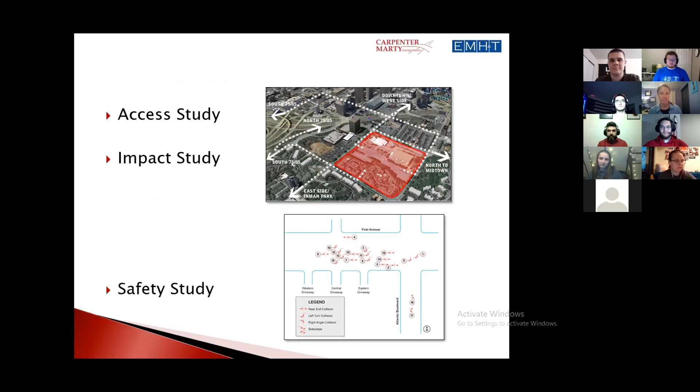So first of all, traffic studies. We're going to be talking about access and impact studies, and then safety studies after that. So for access studies, they're generally the smaller type of impact studies.

So you have a development, and let's say it's a Kroger. You need to do a study to tell the developer what they need to pay for. Do they need a traffic signal? Do they need to add turn lanes? Things like that. So an access study is generally just looking at those specific access points, turn lane warrants, sight distance analysis, just smaller things like that.

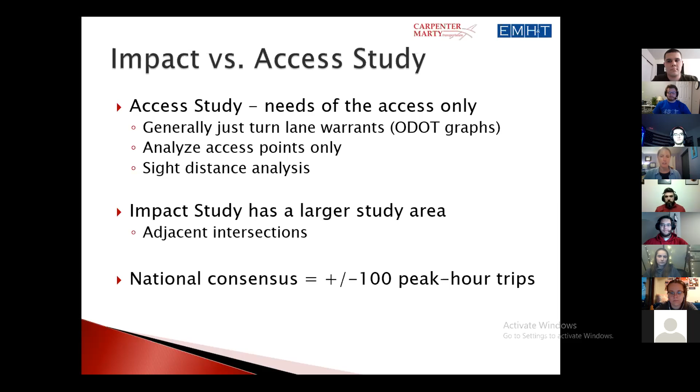Whereas an impact study is a lot larger of an area. You're going to be looking at the adjacent intersections in addition to just those access points. And the national consensus is that if your development has over 100 peak hour trips, then you're going to trigger the need for an impact study.

Okay, and then here's kind of an idea of how those peak hour trips get larger, and then how that triggers a larger study as well. So 0 to 100 peak hour trips are just site drives, whereas 100 to 200, you start getting into intersections, and so on. It starts getting into a larger and larger study based on the size of the development.

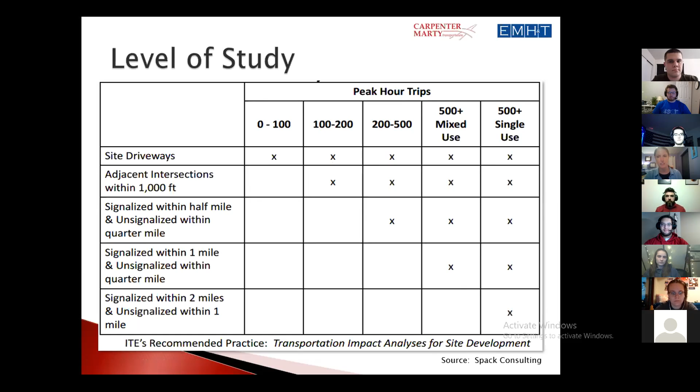Okay, and then some of the other basics. Once you get a developer, they generally have no idea what a traffic study is. They don't know anything about it. So you're there to tell them what they need, what you have to do. So you kind of decide based on the size, is it going to be an impact study or an access study? And then you look at the surrounding area too, like are there other developments happening nearby that we need to consider as well?

You decide on your opening year and your design year. So you don't want to just design your turn lanes for what's going to be there right now. You want to look with growth rates surrounding the area. You might need more turn lanes later, whereas opposed to now, you may not need them.

You also have to do data collection, so turning movement counts, things like that. And usually we just do the AM and PM peak hours, but sometimes you might need a lunch hour, or you might also need to do the school afternoon peak hour. Something like that could get added in just based on the site needs and what's in the surrounding area.

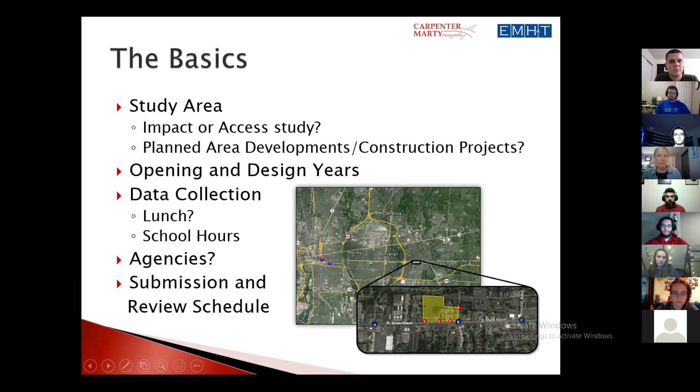You also have to look into the agencies involved. So if your development is in one city, then obviously that city is going to be a reviewer. But sometimes the site is one city, but then the nearby intersections are the county or another city. So sometimes you can get multiple agencies involved. And then after that, you submit the study, they review it, give you comments, and then you revise and go back again.

So then you also do some trip generation and figure out how to distribute that traffic. Let's use the example of the Kroger. You determine how many trips that Kroger needs, and that's based on the land use. You have your grocery store, you have a bank or something like that involved. Let's say you have a Kroger next to a bank.

You may be able to have some internal capture reductions because you might have somebody who's going to pick up their groceries and go to the bank in the same exact trip. So you won't need to double those trips. You can have some reduction based on that. Or if there's transit around, there could be reductions based on that.

There's also different types of trips. You could have trips that are people just going to the grocery store and back home. But then you could have somebody who's driving to stop at the grocery store on their way home from work and then continuing on the same path. So you have different types of trips you have to look at.

And then, like I said before, you're looking at not just your development but also developments in the area and how that impacts the improvements you may need. You look at the distribution of those trips. So it's not just 100 trips going in and out of the Kroger. You have to figure out where those trips are going from each site drive. Are they going to the north or the south? Where do you think those trips are going to and coming from?

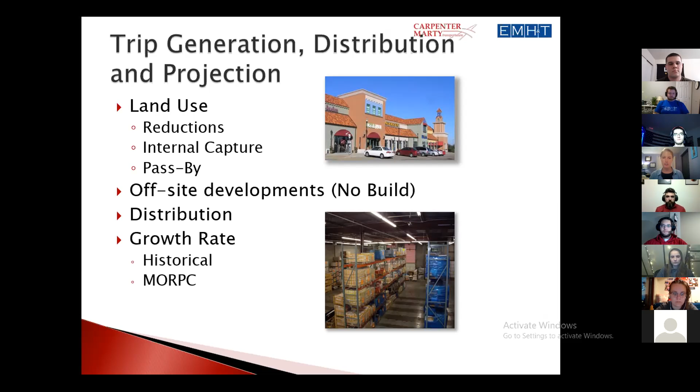And then the background growth rate, because you have your development and other known developments, but there's a lot of growth going on outside of that. So typically we look at historical count data, see how the counts have grown over the years. We also contact MORPC, the local MPO, and they'll give you a general growth rate as well, although they'll take weeks to give it to you. So sometimes it's easier to do that on your own.

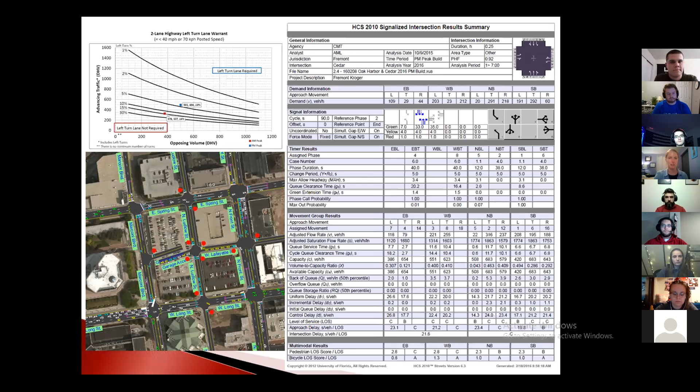Then you take that information and do capacity analysis here on the right. It shows you the control delay, the level of service, things like that. The city will tell you they don't want to exceed a level of service D, so you need to recommend improvements that bring the level of service back to what they consider acceptable. Then you have turn lane warrants over here - there's a certain number of turning movement volume that will trigger the need for a turn lane, so there are graphs you use to tell if you trigger that or not.

Basically with an impact study and access study, they're both just telling you what things are like now, what they're going to be like in the future, and then what they're going to be like after the development is over. So they can pin those improvements on the developer and the city doesn't have to pay for all of that.

After we do the analysis, you look at it stage by stage in your existing, no-build, and build conditions, and see what improvements are needed for each scenario. Then recommend solutions after that, bundle it all up in a report and go from there.

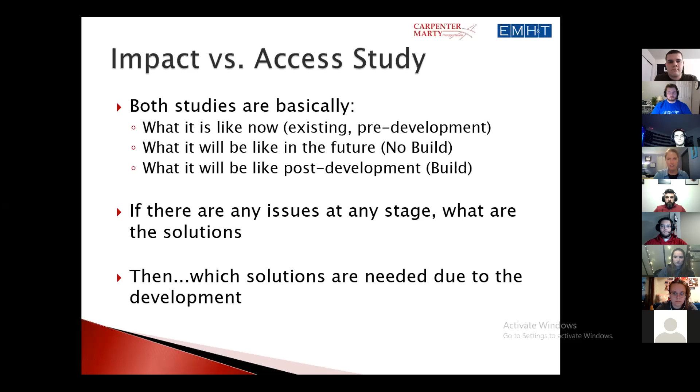Okay, then next I'm talking about safety studies, which is my personal favorite topic. So each year ODOT prioritizes their roadway segments and intersections throughout the whole state, and they basically choose which intersections they want to study.

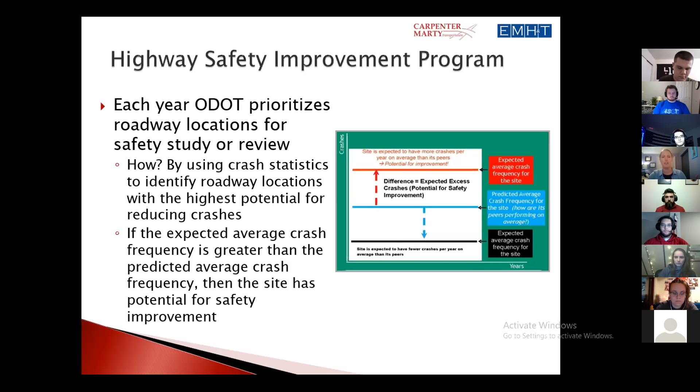They do that by looking at crash statistics and identifying those locations with the highest potential for reducing crashes. So they look at the expected average crash frequency and compare that to the predicted average crash frequency, which is based on the type of site and how it compares to its peers, and that determines if that site has a potential for safety improvement - whether it's worth making those improvements.

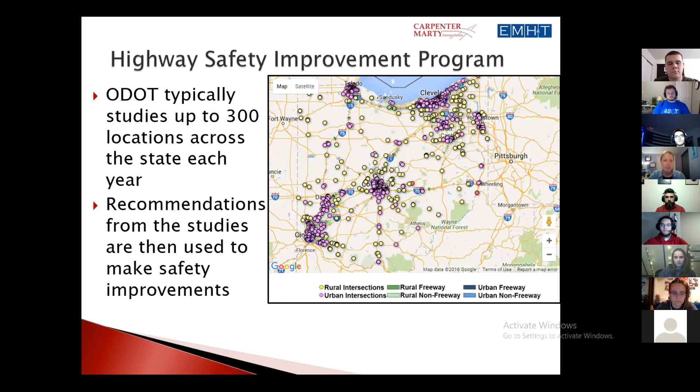Here's a map of those locations, and this is kind of old too, but you can see generally there are big groupings of these intersections and segments where the big cities are - so Cincinnati, Columbus, Cleveland, Toledo. That's where all our high crash intersections are, with some sprinkled throughout as well. Then we study those sites and tell them if they need to make safety improvements and what those improvements would be.

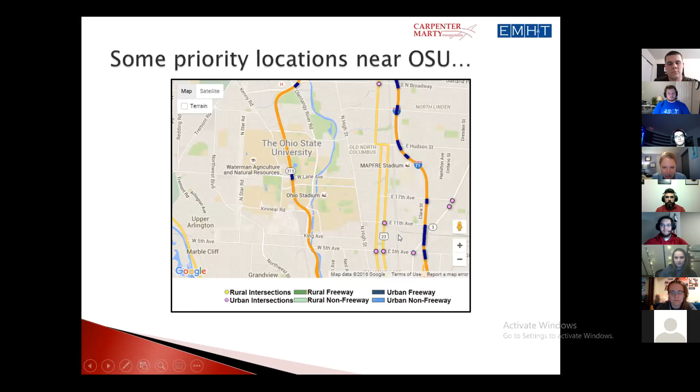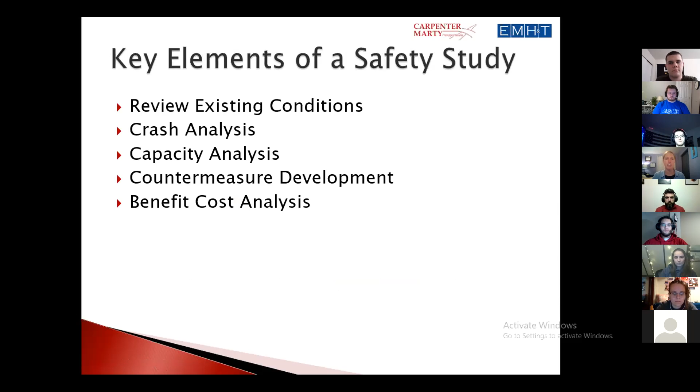Okay, so some key elements of a safety study: first we just look at the existing conditions. Sometimes just by doing a site visit, you can immediately tell what the issues are. Then we look at the crash analysis, the capacity analysis, and start developing countermeasures, and then we do a benefit cost analysis, which I'll go through.

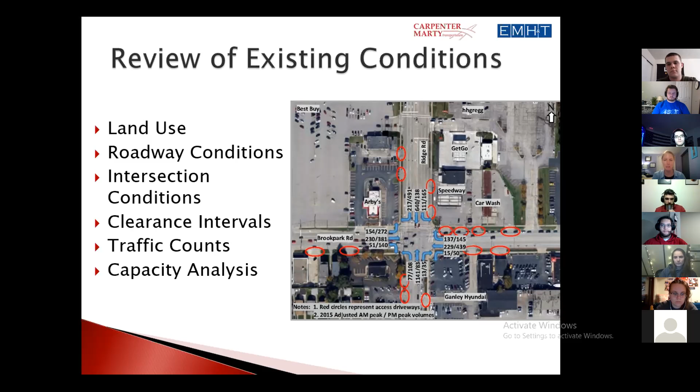You look at the roadway conditions. Is there a lot of pavement rutting? Things like that. Intersection conditions. How does the signal operate? Is it stop controlled? You look at the clearance intervals, the traffic counts, and then you do capacity analysis, because sometimes you'll find out that there are crashes just because drivers are frustrated and they can't get through the intersection. So they're trying to push that yellow, which can cause crashes.

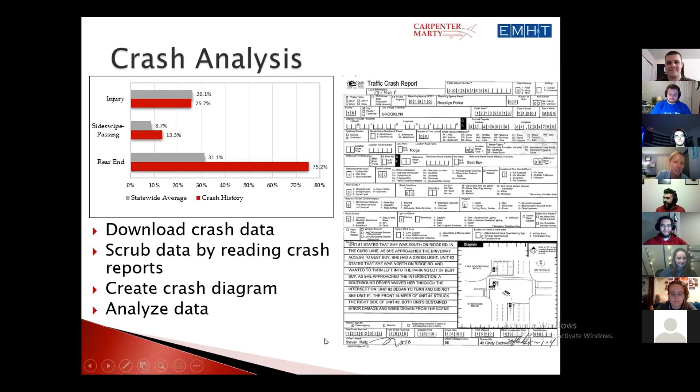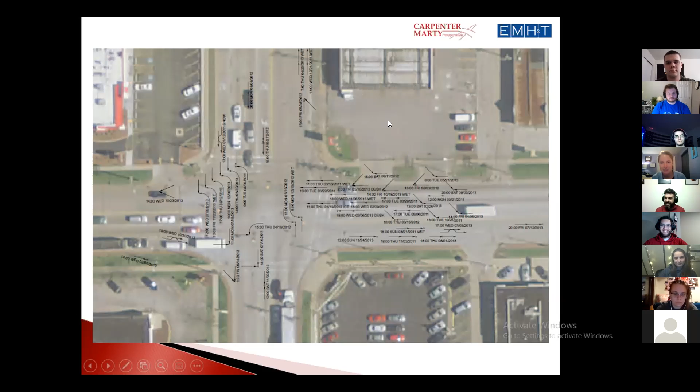But so basically you review all that data, you analyze it, and then you come up with this crash diagram, which helps to show trends in the crashes. So you can see, like over here, there's a lot of left turn crashes. Over here, there's a lot of rear end crashes on this approach, and a lot of angle crashes here at these site drives, because I don't know why this gas station decided they needed 4 different access points. It's a little redundant, just adds more conflict points.

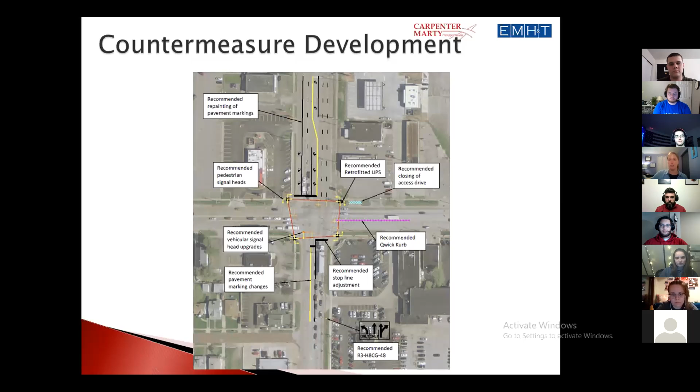And then we may make some little recommendations like signage, or adding some signal upgrades, pavement marking upgrades. The changes could be smaller or larger, and usually we do make those low cost, quick fix recommendations. So that way, if they want to do something really quick, they can, while they're waiting for their roundabout to be designed, 3 years down the road.

Okay, and then after you decide what you want to do, you make a cost estimate for that. So like, what's it going to cost ODOT to implement a roundabout at this intersection? And then they have this database that basically tells you how many crashes they expect that to mitigate. And it's sad, but they put a number, like a price, on those crashes. So injuries, fatalities, just minor fender benders, everything. They have a crash cost associated with that.

So then you're comparing the cost of that roundabout improvement to the benefit of reducing those crashes, and then you come up with this benefit cost ratio. And so that tells you, is your project that you're proposing worth the investment? And I will say, it's not always straightforward. There are so many times where there's projects where we have a benefit cost ratio that's less than 1, but just using engineering judgment, that it's a good recommendation and that it's going to mitigate crashes. So it's not the end all be all.

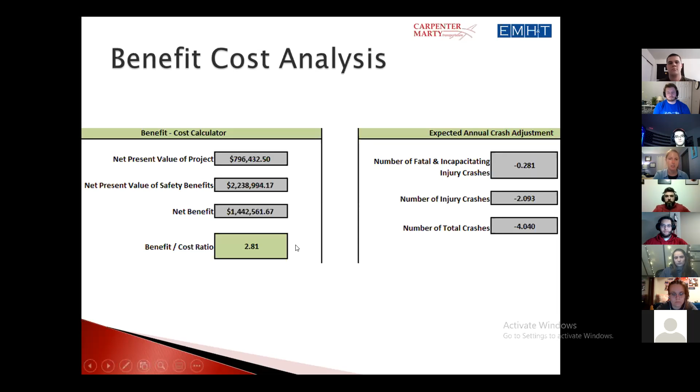Okay, so I have this, but I don't know if you want to take questions now or kick it to Nick and take questions at the end. We can do both, unless anybody has a burning question they want to ask just right now. Cool, then we'll kick it to Nick. All right, we'll keep going.

All right, can you see the screen? Yeah, that looks great. Perfect.

So Gina covered the traffic planning side of what we typically encounter on a regular basis. I'm going to go through the different traffic engineering design components that traffic engineers with our companies would handle. So at both Carpenter Marty and EMH&T, we'll cover both sides of traffic engineering, the planning as well as the design work for various projects. So I'll go through what we typically encounter in the design as traffic engineers.

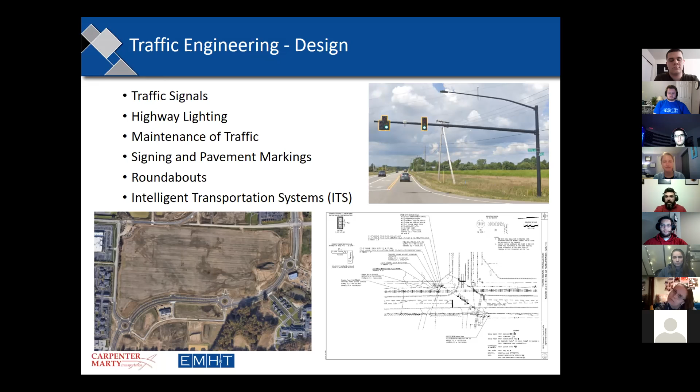These are the steps that come after the planning portion is completed. Then we'll go through this process to actually turn the planning into a project. So the first item I wanted to touch on was traffic signal design.

Span wire signals generally save a little bit of cost, and one advantage is you can span a lot larger roadways. If you've driven in the Polaris area or anywhere with a really large multi-lane roadway, sometimes you'll see these because the mast arm is limited. You can't have a 100-foot or 150-foot arm, it starts to get a little impractical, so sometimes span wire is preferred in those cases.

With the mast arms, they cost a little bit to quite a bit more, but a lot of times we'll work with agencies and they'll prefer these over the span wire just to fit their streetscape, making sure they have a coordinated color scheme and decorative poles that match their light poles. So the mast arms can provide a little bit better looking traffic signal, and agencies, especially cities, like that a little bit more.

Additionally, mast arms provide a little bit better visibility. As a driver, when you approach a mast arm, it tends to stand out a little bit better as you approach an intersection, so from a safety aspect that can help over a span wire. Drivers are more likely to notice an object, especially if they haven't driven through a signal or it's been a long stretch, so it can make the visibility a little bit better.

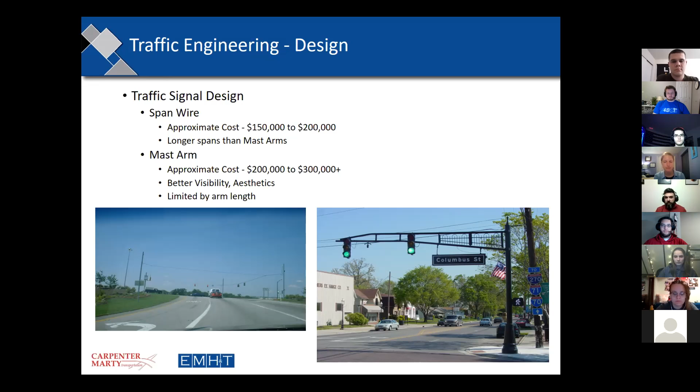So there's definitely pros and cons to both. As traffic engineers, depending on the agency preference and what the project calls for, we'll design one or the other. We encounter both of these on a pretty regular basis.

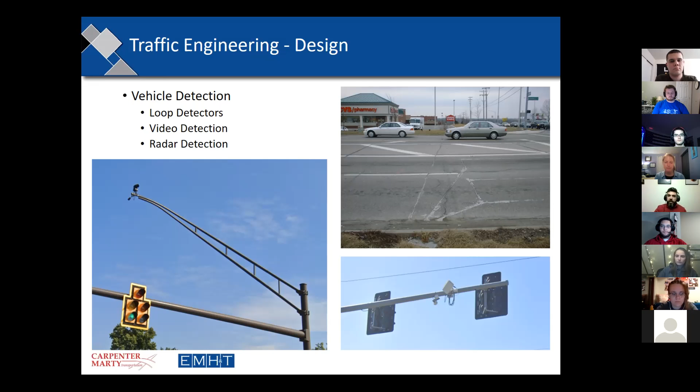In addition to the traffic signals for vehicles, we'll also design pedestrian traffic signals. These are for roadways that don't necessarily need a traffic signal, or for crosswalks like mid-block crossings, not necessarily at a major intersection.

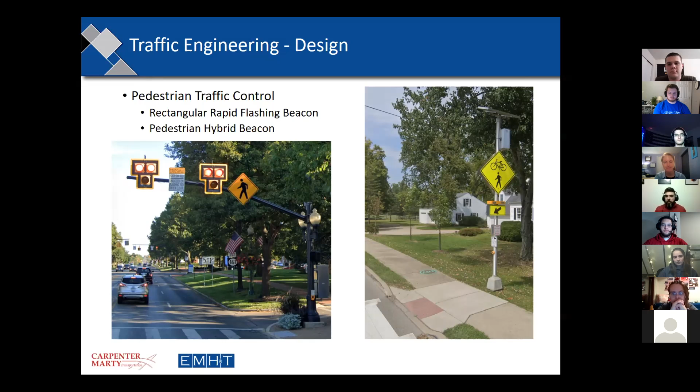Essentially these function slightly less involved than a full traffic signal, and they're more appropriate for pedestrian crossings. So when you have a crosswalk and maybe you're getting poor compliance for vehicles stopping for pedestrians, or you just have a lot of pedestrian traffic, these can be used to help facilitate that crossing and make drivers aware that this is where the pedestrian crossing is.

I focus predominantly on traffic signal design, so I'm going to touch on some other aspects of design that I have a little less experience in, just to give you a background and show the broad range of what we cover. Highway lighting is something I didn't even know, graduating college, that a traffic engineer handled, but it kind of goes hand in hand with the signals and the wiring that we do for those.

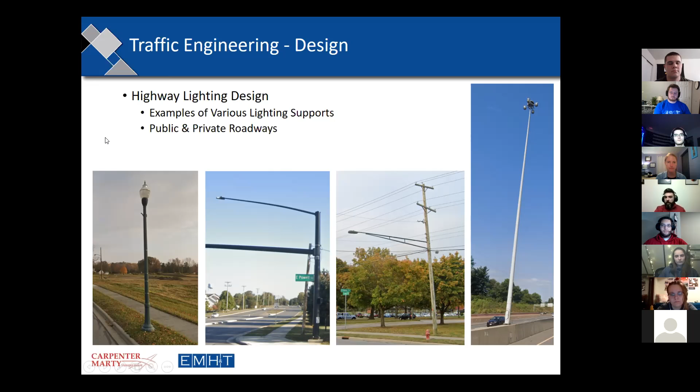We'll actually design and place street lighting for various facilities, and it can range anything - on the left we have just a decorative pole for a low volume, low speed roadway like a residential street, and all the way on the right is a sample of what you've probably seen everywhere, freeway lighting with high mast supports, and pretty much anything in between. So highway lighting is something the traffic engineering design department handles as part of the roadway design process and putting together the plans.

In addition to deciding what type of poles we'll place, we'll also physically locate the poles. We'll do analyses called photometric analysis - it helps us figure out where to put the poles, pole height, and spacing. It's dependent on the type of illumination we select, and each agency has different requirements. Depending on where you actually place the poles, there's different brightness requirements. They also have average illumination requirements - you don't want somebody driving into light spots, dark spots, light spots; you want the roadway lit pretty uniformly. So we'll decide, based on agency requirements, where to place poles and determine what luminaires to use based on their types of requirements. That can range anywhere from the freeways down to just basic parking lot lighting or pedestrian crossing lighting.

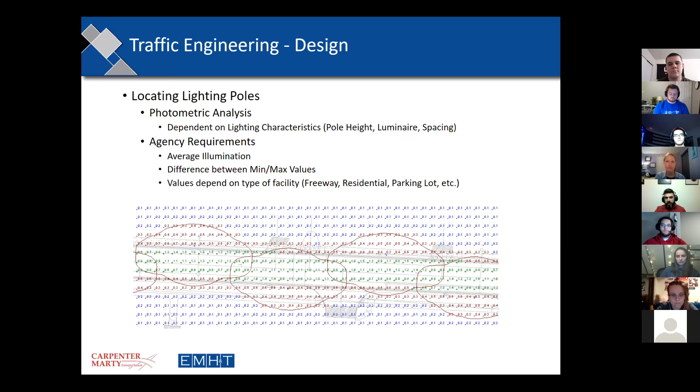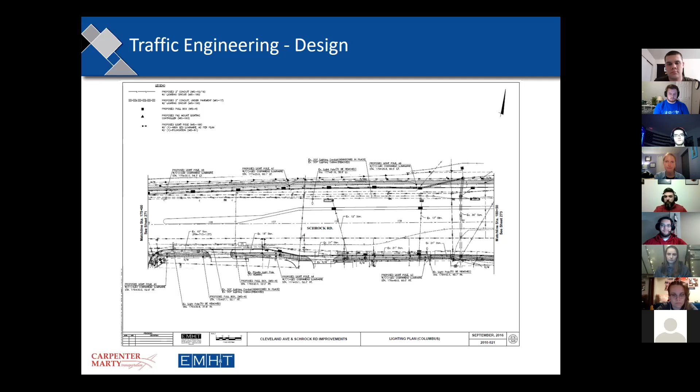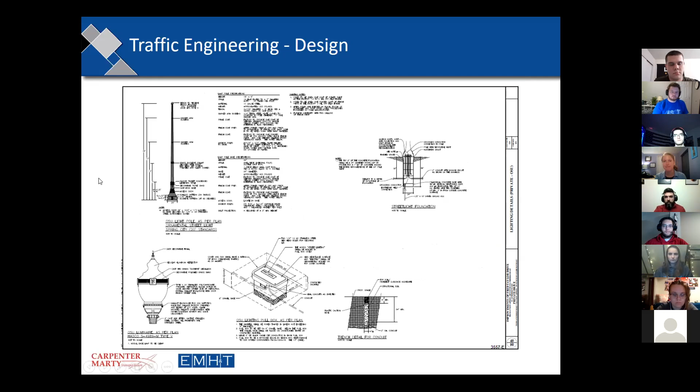Again, kind of like the traffic signals, this is just a sample plan sheet. We'll actually show the wiring, show placement of the different items to make a street lighting plan work. This is Cleveland Avenue and Schrock Road - I pulled quite a few sheets from that plan, but this just shows a sample lighting plan for reference. In addition to that, we'll also document any decorative items that an agency might want. Again, that's all part of the lighting plan - we'll cover that for the agencies as well and make sure it's included in the plans.

Maintenance of traffic is another component of what we do. Believe it or not, a lot of the work zones are actually designed. Sometimes it looks like kind of a mess, and sometimes we're really limited on what we can do.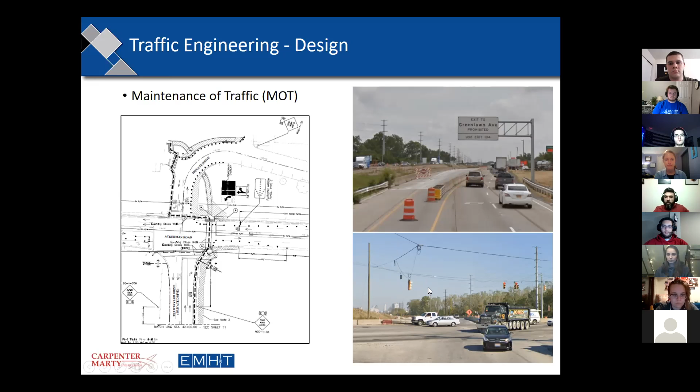This shows a sample MOT sheet. The shading on this particular sheet shows where the contractor would be working during this phase. This is Cleveland Avenue and Schrock, a fairly busy area on the north end of town, north of Columbus, with tons of traffic volume coming through daily.

This lays out the different requirements, any modifications to signage, pavement markings if they need to place them. You can see some portable barrier in this sheet. Some of the signs might not be applicable to this layout, so you have to make sure you pull those out so you're not sending confusing messages to drivers. A lot actually goes into planning the work zones to accommodate the traffic volume and provide a safe working environment for the contractor to build whatever the project is.

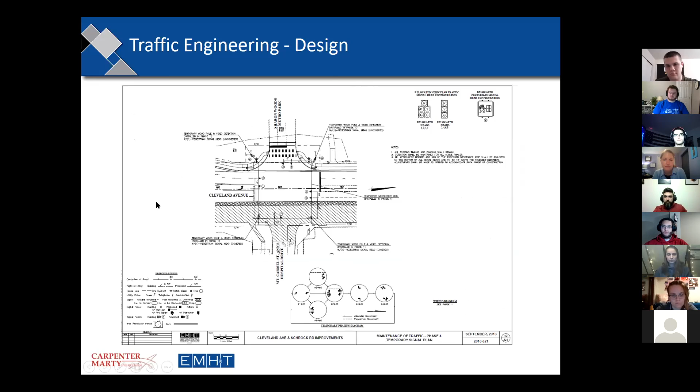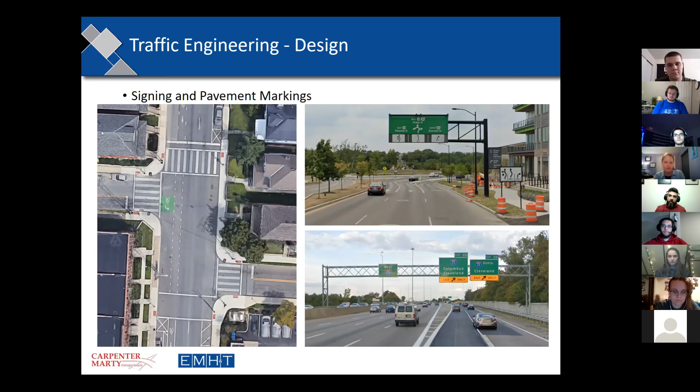That's the roundabout up in the Dublin area, a 3-lane roundabout—if anybody's driven through that, this is one of the approaches up that way. Then there's freeway signing, the big overhead signs, typical freeway markings. Like the other aspects—traffic signals, pedestrian crossings, lighting—this ranges all sorts of scales, from small local roadways all the way up to major freeways and major projects like the roundabout.

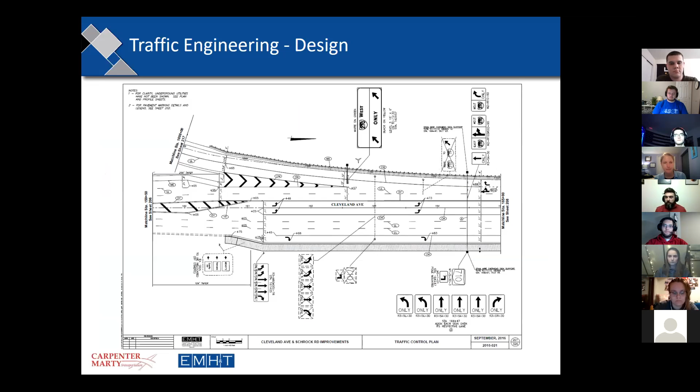For this type of design, the signing and markings, there's very specific spacing and guidelines that go with these. A lot of agencies have their own requirements—different sign requirements, sign sizes. It can get a lot more complex than just throwing down some paint and calling it a day. A lot of these items are planned out to create a uniform environment, making sure that if you see this somewhere, you know what to do and what the signs mean.

This is just a sample sheet showing the different signage, maybe items to be removed, and then what type of lines and what type of paint material a contractor would use to make this happen.

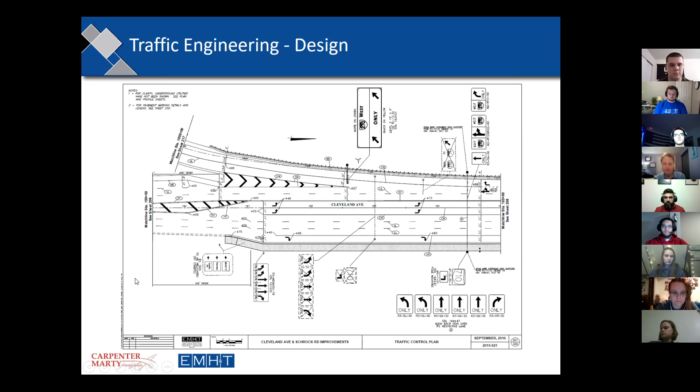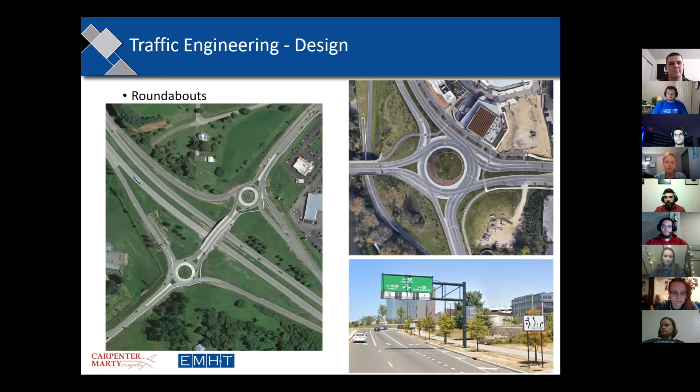Roundabouts are an item that we will design, and there's a lot of different checks that go into it. It's not quite as easy as throwing a circle down and making sure the roadway ties in. We'll look and make sure the curves are slowing people down on entry—that's what the diagram on the left is showing.

And we'll also make sure that large vehicles, such as semi trucks, can make it through the roundabout. That's part of the design checks as well. So cars, it's pretty easy to design for, but the larger vehicles, we want to make sure the roundabout can accommodate that. Nobody's going to get stuck in the roundabout.

So you've probably seen different agencies handle this different ways, but this center section will usually have some kind of brick or pavers or pavement inside with a mountable curb around it. That's just to facilitate the truck movements. The trailer can off track onto that and make sure the semi truck can get through the roundabout without causing any issues, running in the grass or getting stuck as it goes through.

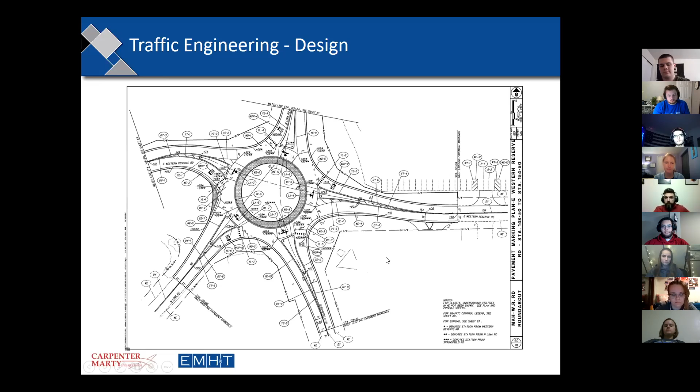So that covers the traffic engineering design component of what we do. If anybody has questions, either on the planning or the design side, feel free to ask, and Gina and I will answer them for you.

I have a question. With autonomous vehicles becoming more common, do you see that increasing the amount of work for traffic engineers, or do you think that'll decrease the amount of work for traffic engineers?

That is a great question. This isn't necessarily based on any professional experience I've encountered at the job, but I think depending how the vehicles are set up, especially that transition phase, it's going to be important for traffic engineers to be involved and aware of the capabilities of the vehicles, especially if we're having a transition period where the vehicles aren't quite fully autonomous and we still have people physically driving cars. I think up until we go fully autonomous, if we ever get to that stage, but the crossover phase especially, I think it'll take a lot of work and coordination with traffic design to make sure everybody can use the road together.

Yeah, I agree. I think our jobs will just kind of slowly pivot as things change, and we'll just change with it.